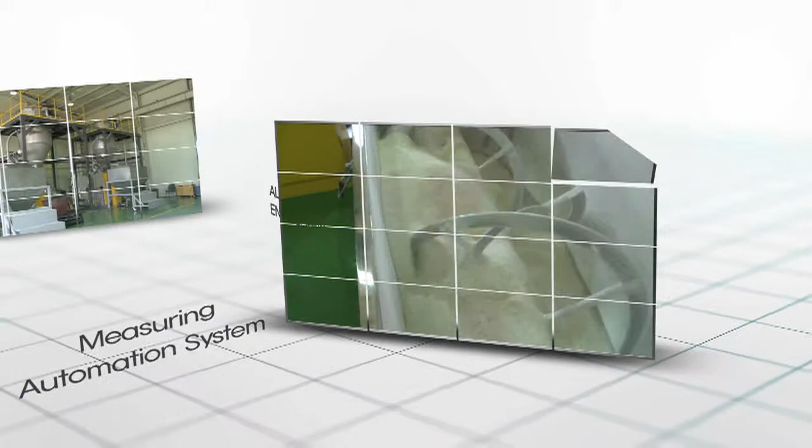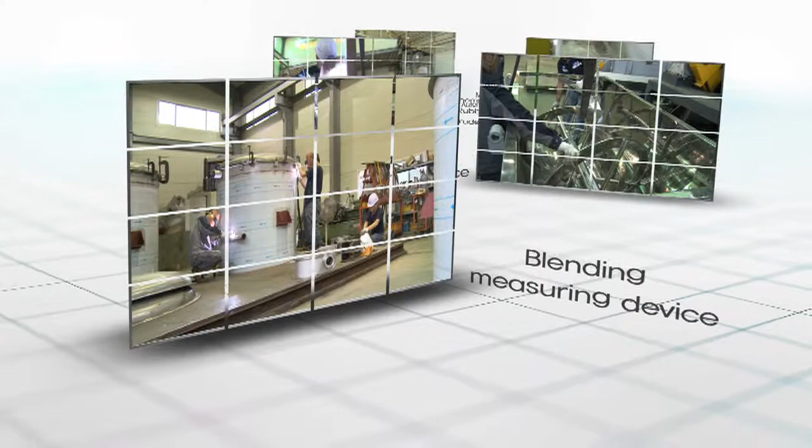Alpha Engineering has made faithful efforts to develop a precision measuring industry in many industry fields, including Korean petrochemical resin, rubber, and plastic extrude materials, by sticking to the measuring field since it was established.

This company is contributing to the factory automation industry, including relevant equipment, focusing on transfer measuring devices, blending measuring devices, and packing measuring devices, which are indispensable in industrial measuring automation systems. We will start cutting-edge measurement through research and development by measuring automation that reflects the present age.

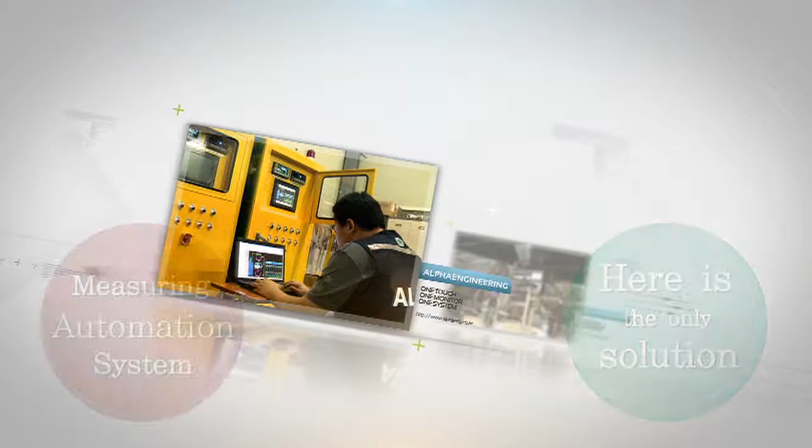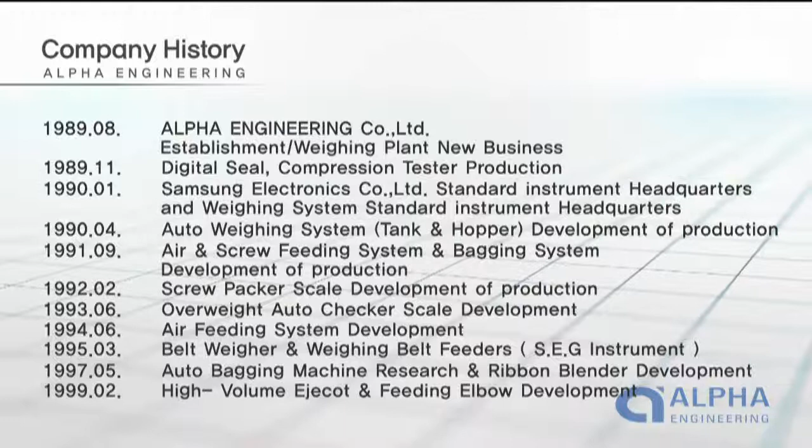Alpha Engineering has established itself as a representative company which specializes in design, manufacture, and installation of measuring automation equipment, and has provided customized consulting for customers since it was founded in August 1989. Alpha Engineering is satisfying customers' requirements by presenting the best products that customers want under optimal conditions based on its own technology of measuring automation, focusing on it endlessly.

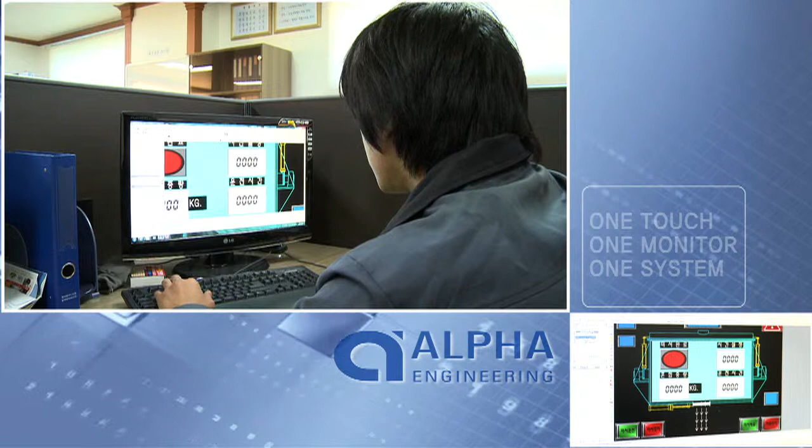Therefore, it has been loved by customers due to practicing close follow-up management personally, as well as manufacturing efficient and effective equipment. All the executives and staff members who learn their know-how based on long-term experiences are building the management system, which is with you, as they consist of the best technicians in the relevant fields, ranging from research and development to production, QC, and the sales field.

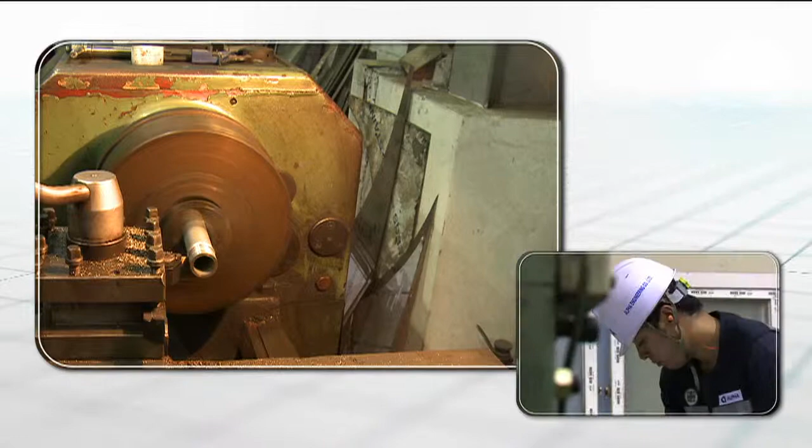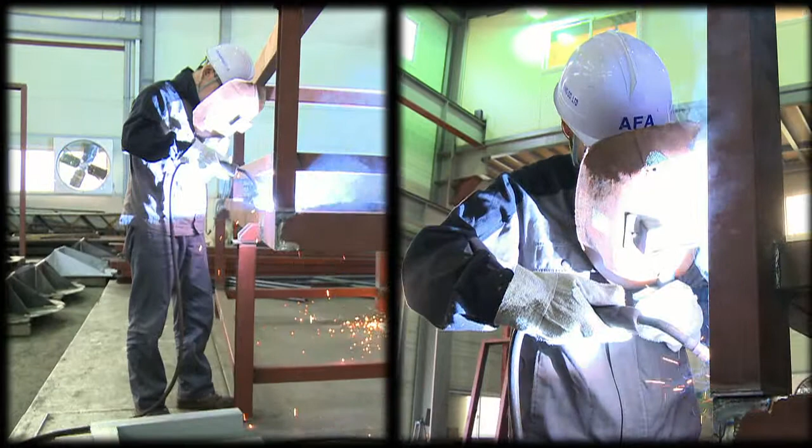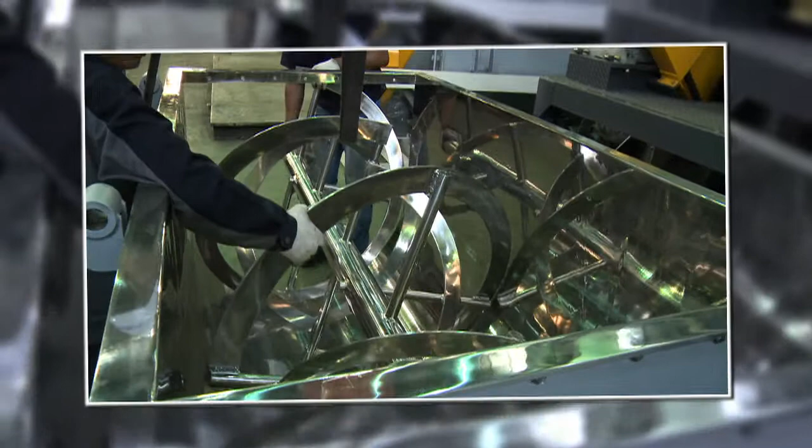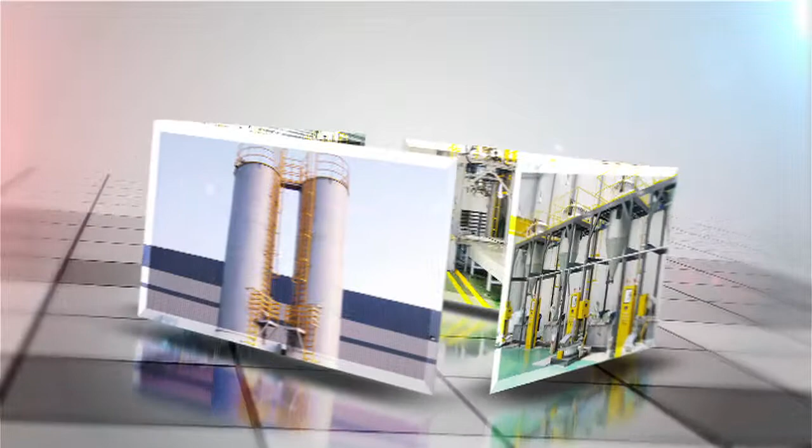Alpha Engineering directly designs and manufactures equipment to provide the best products for customers and is delivering and installing only the highest quality through thorough inspection and repetitive tests. All the processes of equipment consist of a control system whose maintenance is easy and which minimizes user inconvenience. The production process of compound production equipment consists of 4 stages as follows.

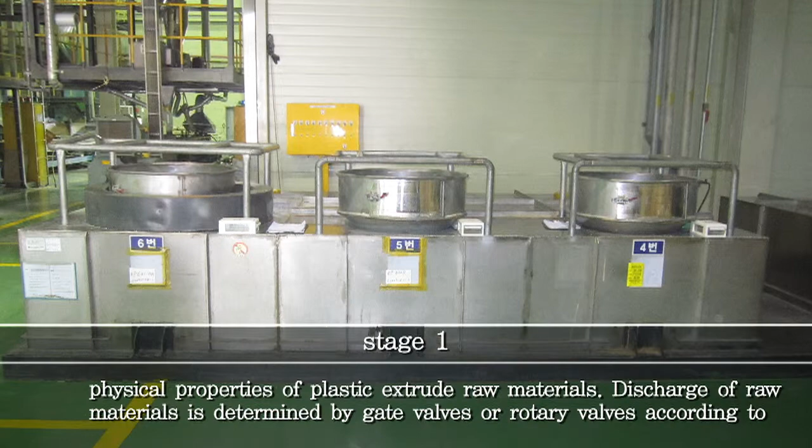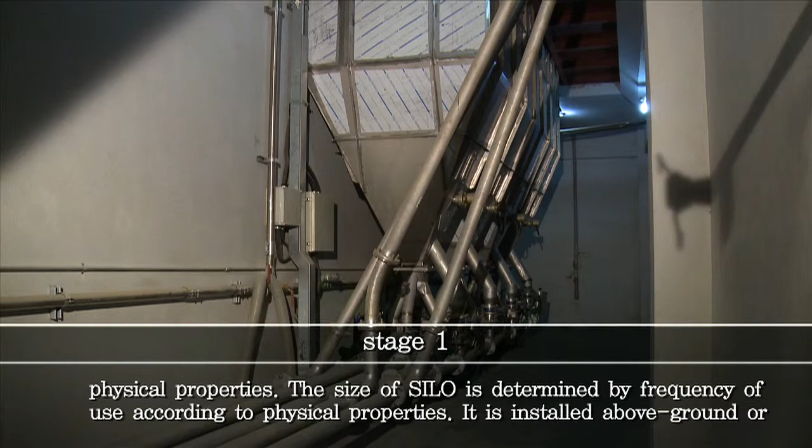In Stage 1, the silo part to store and supply different raw materials supplies several raw materials which are already stored to meet physical properties of plastic extrude raw materials. Discharge of raw materials is determined by gate valves or rotary valves according to physical properties. The size of the silo is determined by frequency of use according to physical properties. It is installed above ground or underground according to the environment of factories. However, the underground type is efficient for the user.

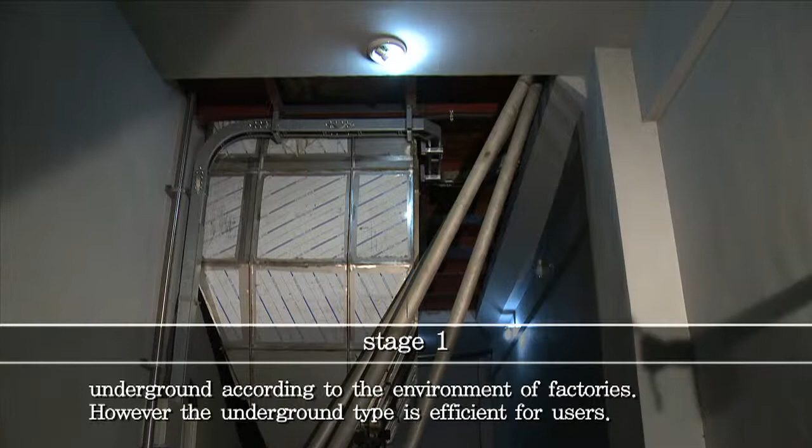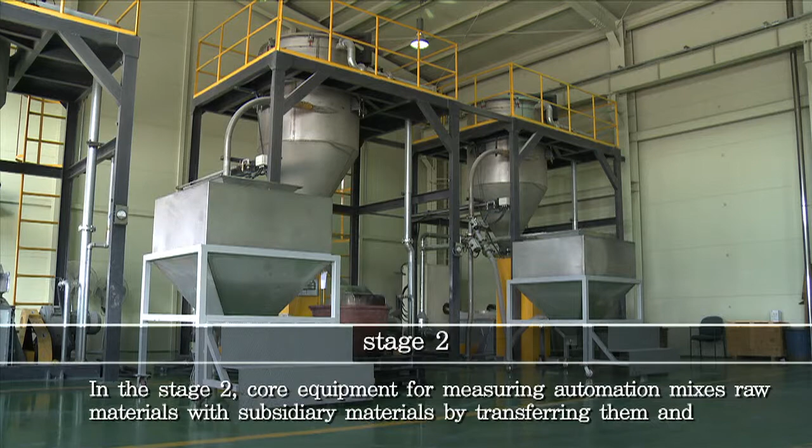In Stage 2, core equipment for measuring automation mixes raw materials with subsidiary materials by transferring them and measuring the fixed quantity. It consists of transfer equipment, a measuring hopper, a ribbon mixer, a cushion hopper, and a device. It makes the first fixed quantity by transferring and measuring according to fixed quantity in the silo through the measuring automation control system.

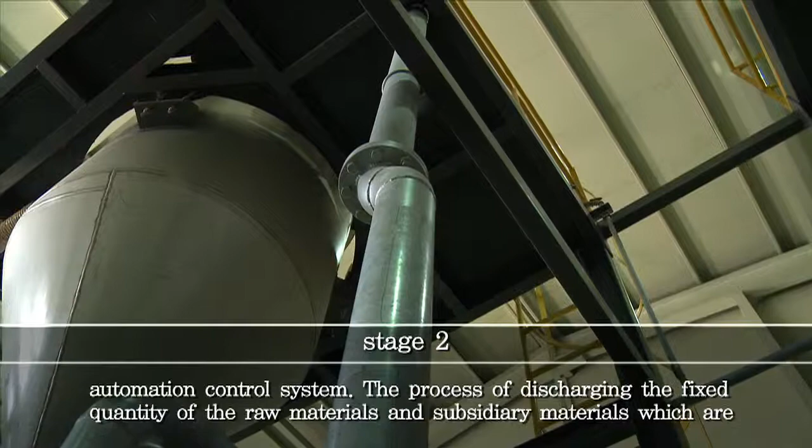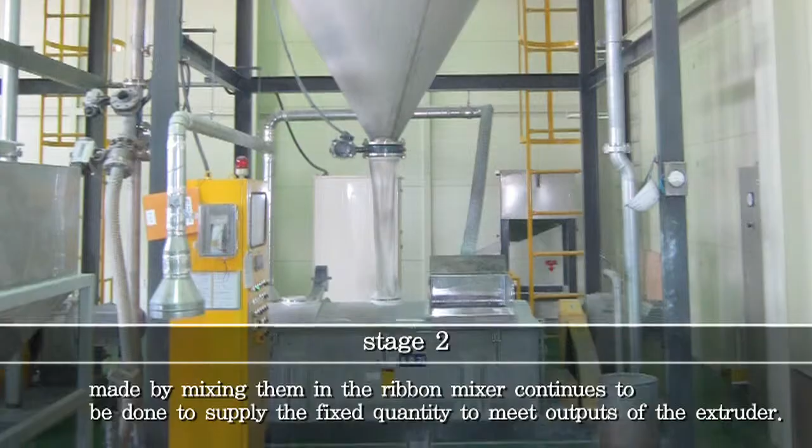The process of discharging the fixed quantity of the raw materials and subsidiary materials, which are made by mixing them in the ribbon mixer, continues to be done to supply the fixed quantity to meet outputs of the extruder. As the process by equipment is monitored and input of the raw and subsidiary materials is automatically supplied by the fixed quantity, production is very effective.

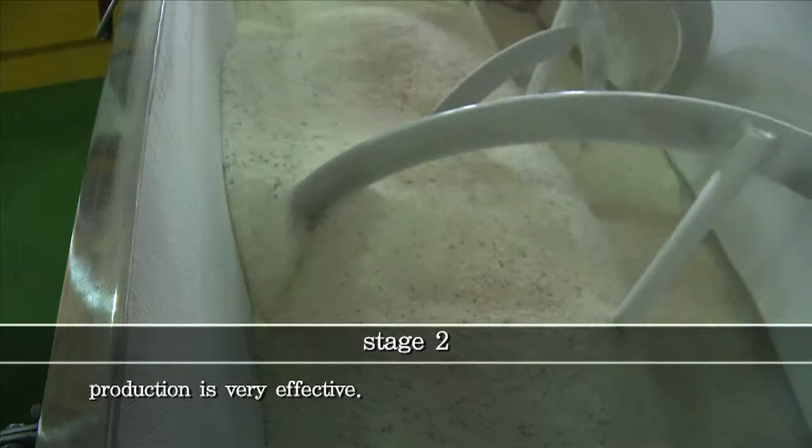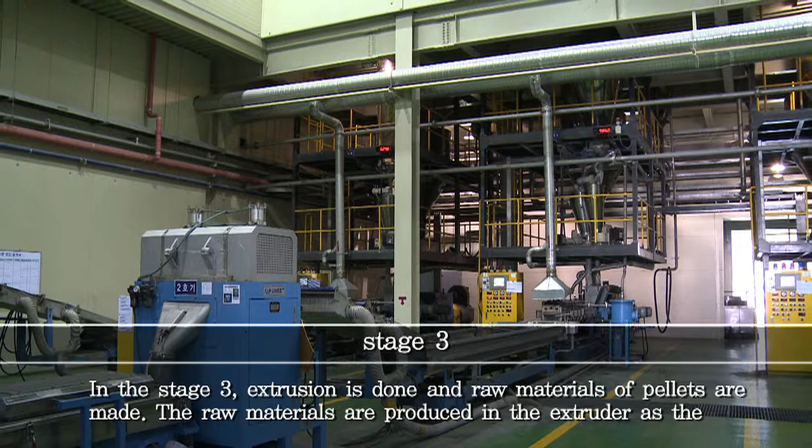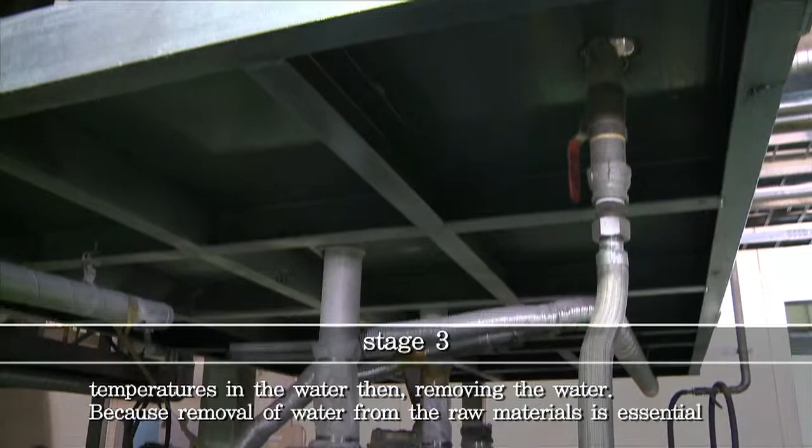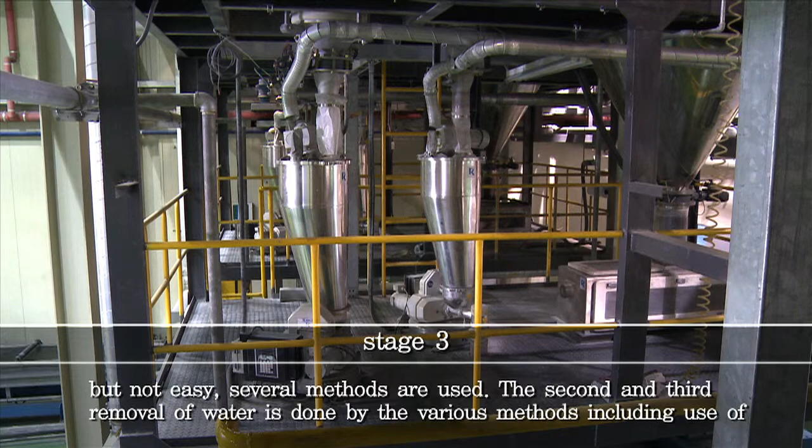In Stage 3, extrusion is done and raw materials of pellets are made. The raw materials are produced in the extruder as the device to supply the fixed quantity. Also, the raw materials of pellets are produced by cutting them by first cooling high temperatures in the water, then removing the water. Because removal of water from the raw materials is essential but not easy, several methods are used. The second and third removal of water is done by various methods, including use of sorters using fan blowers according to the characteristics of raw materials.

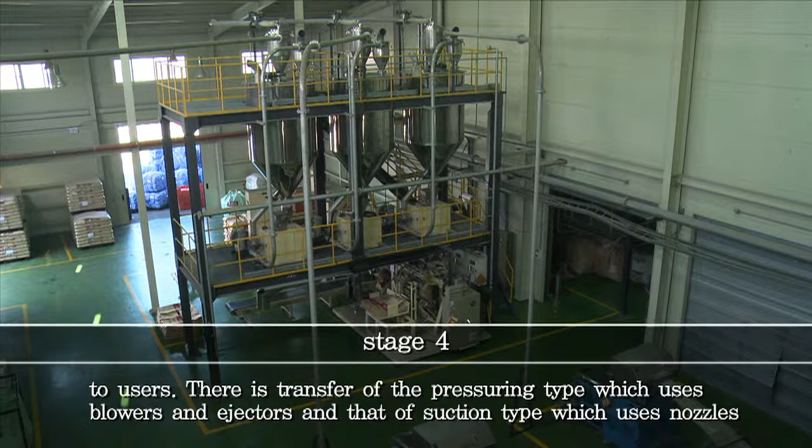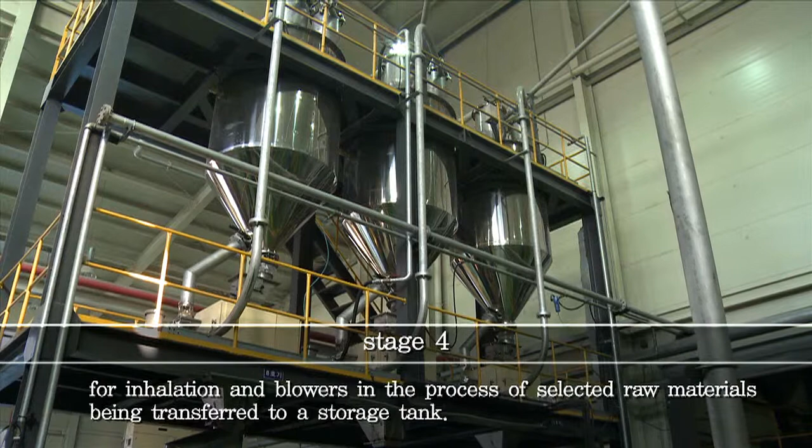In Stage 4, the selected raw materials are packed in 25 kilogram sacks and bulk bags by the fixed quantity to be easily delivered to users. There is transfer of the pressuring type, which uses blowers and ejectors, and that of the suction type, which uses nozzles for inhalation and blowers, in the process of selected raw materials being transferred to a storage tank. Therefore, in this stage, the transfer method is determined by physical properties of raw materials.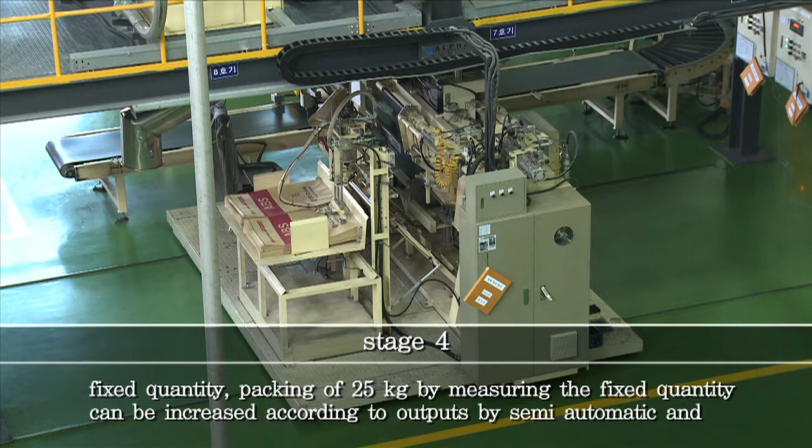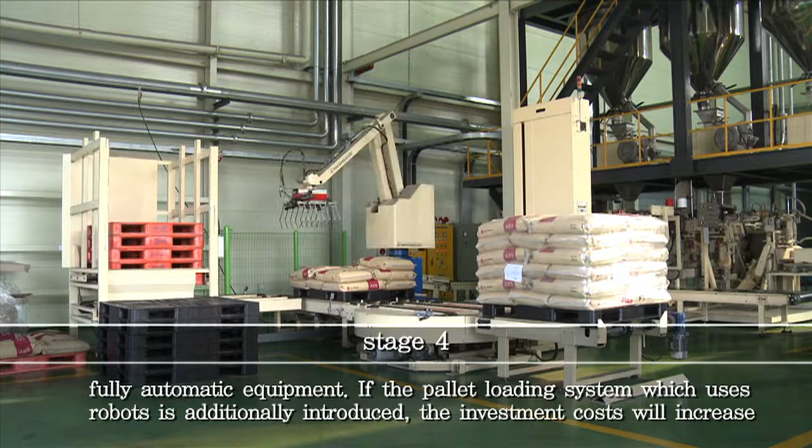For packing by the fixed quantity, packing of 25 kilograms by measuring the fixed quantity can be increased according to outputs by semi-automatic and fully automatic equipment. If the pallet loading system, which uses robots, is additionally introduced, the investment costs will increase, but manpower shortages and high wages can be solved.

The facilities, which were manufactured after consulting Alpha Engineering, are gaining much recognition from big companies as well as small and medium-sized businesses which are now producing compounds. We will be a global company by technical innovation, which is responsible for solutions in the measuring automation field, by continuing to research and develop various smart and hybrid facilities, and strive to always be with you. Thank you.